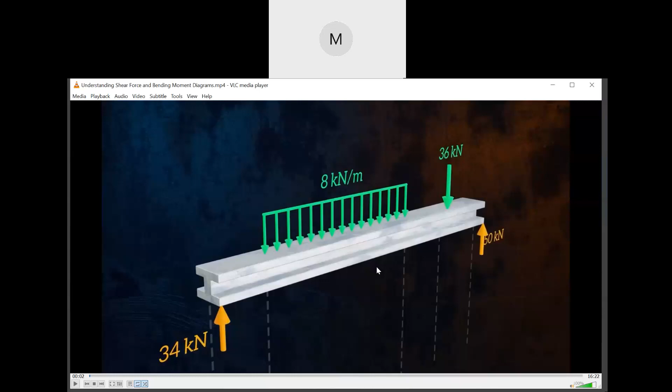Can you see my screen? Can you all see my screen? Can you all see my screen? Sir, okay.

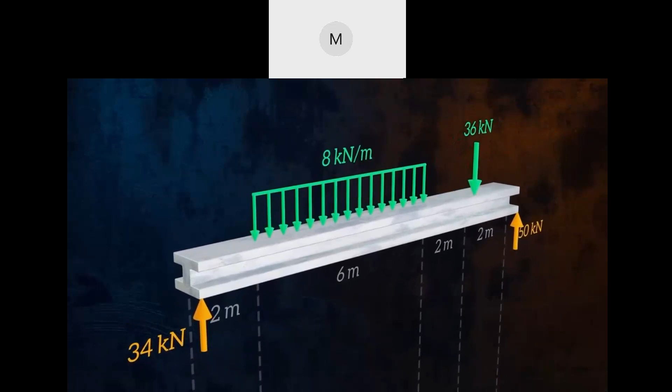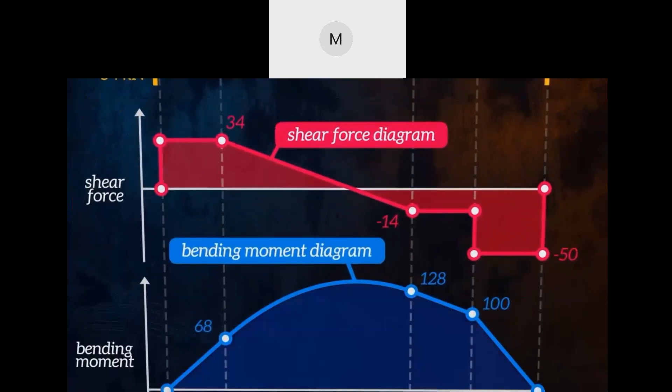Shear force and bending moment diagrams are powerful graphical methods that every mechanical and civil engineer should know how to use to analyze a beam under loading. In this video, I'll explain exactly how to master these diagrams, and we will see how they can be used to understand how a beam is loaded. I want to start by explaining what shear forces and bending moments actually are.

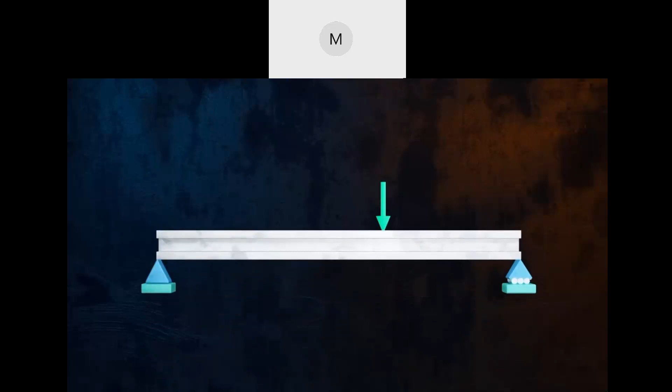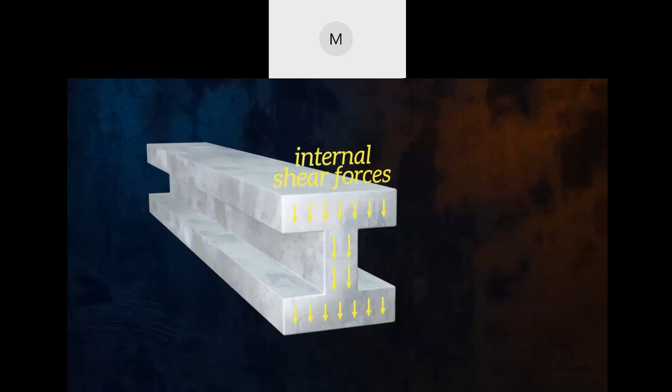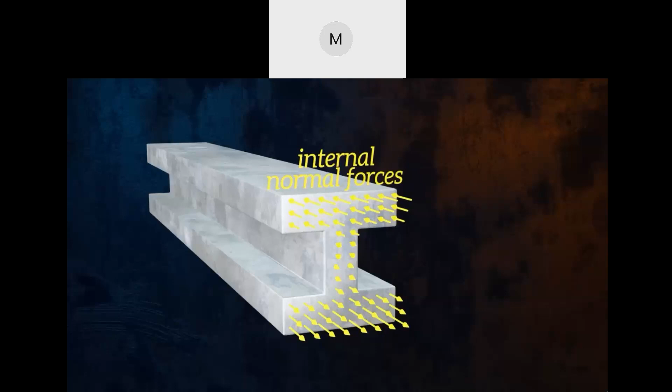When a beam is loaded, internal forces develop within it to maintain equilibrium. These internal forces have two components. We have shear forces, oriented in the vertical direction, and we also have normal forces, which are oriented along the axis of the beam. If the beam is sagging, the top of the beam will get shorter, and so the normal forces in the top of the beam will be compressive.

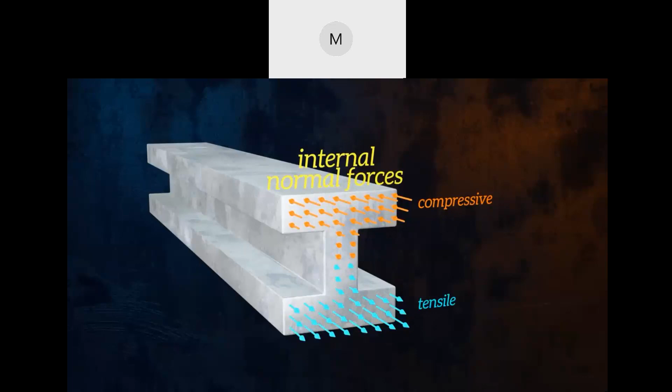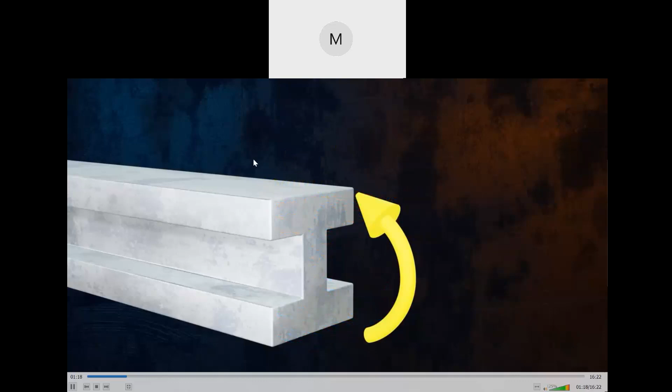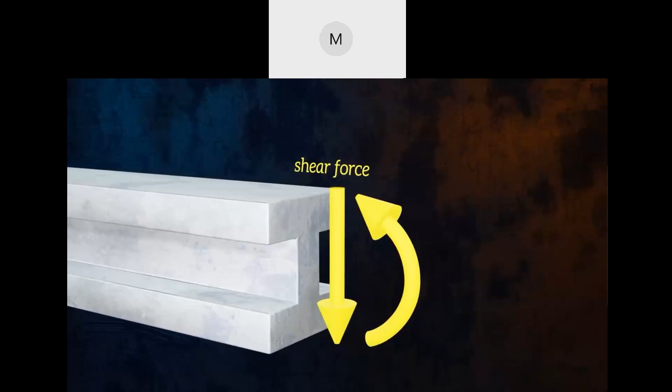The bottom of the beam will get longer, and so the normal forces in the bottom of the beam will be tensile. Each of the tensile normal forces has a corresponding compressive force, which is equal in magnitude but opposite in direction. As such, these forces don't produce a net normal force, but they do produce a moment. This means we can conveniently represent the internal forces acting on the beam cross-section using just two resultants. One, shear force, which is a resultant of the vertical internal forces, and one bending moment, which is a resultant of the normal internal forces.

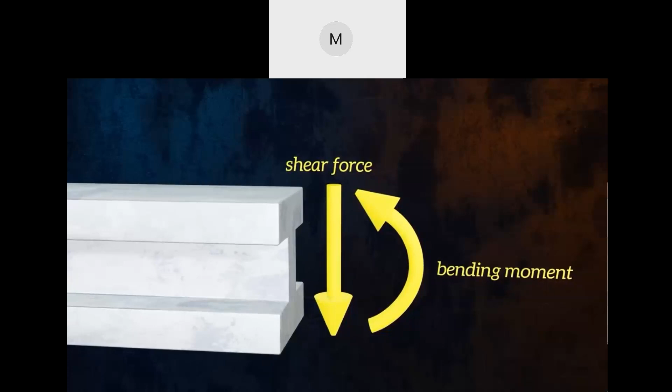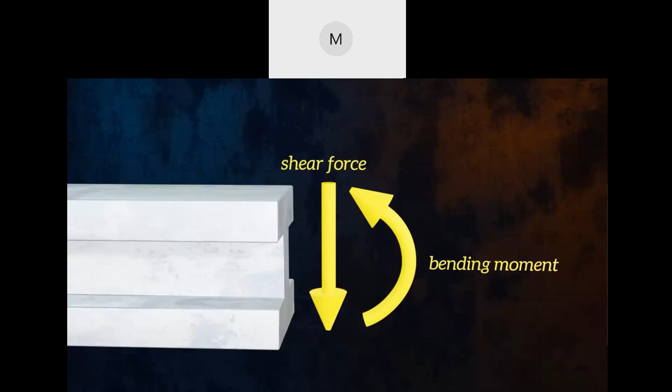This is a very common way of representing the internal forces within a beam. Drawing the shear force and bending moment diagrams is just figuring out what these internal forces are at each location along the beam. These resultant shear forces and bending moments will depend on the loads acting on the beam and the way in which the beam is supported. Beams can be loaded in a number of ways, the most common being concentrated forces, distributed forces, and concentrated moments.

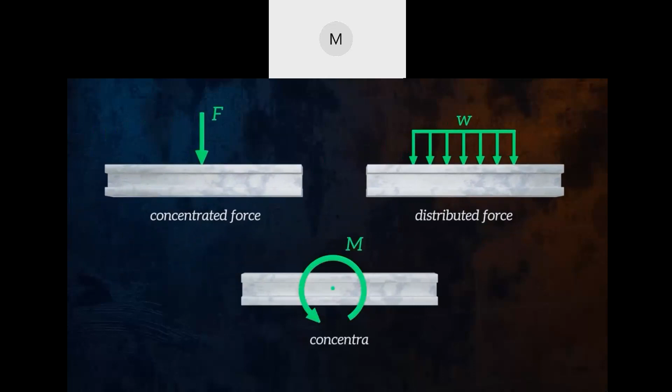Beams can also be supported in a number of different ways. They can have pin supports, roller supports, or be fully fixed, which each restrain the beam in different ways. Pin supports prevent vertical and horizontal displacements, but allow rotation. Roller supports prevent vertical displacements, but allow horizontal displacement and rotation. Fixed supports prevent all displacements and rotation.

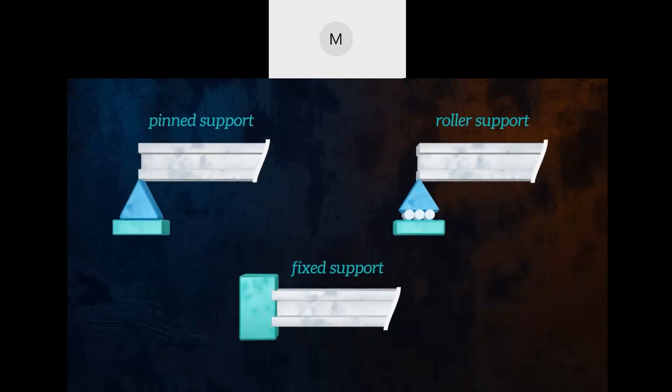If a certain degree of freedom is restrained at a support, we will have a corresponding reaction force or reaction moment at that location. For example, rotations are permitted for a pin support, so there is no reaction moment, but displacements in the vertical and horizontal directions are prevented, so we will have horizontal and vertical reaction forces. So how do you determine the shear forces and bending moments within a beam? There are three main steps we need to follow.

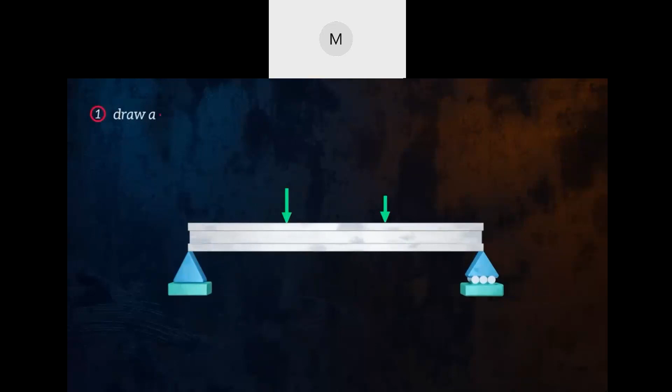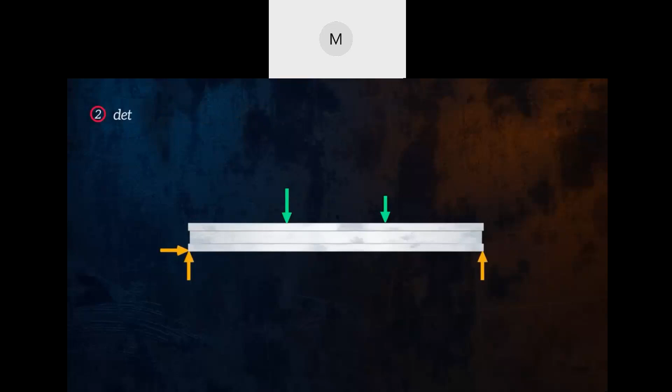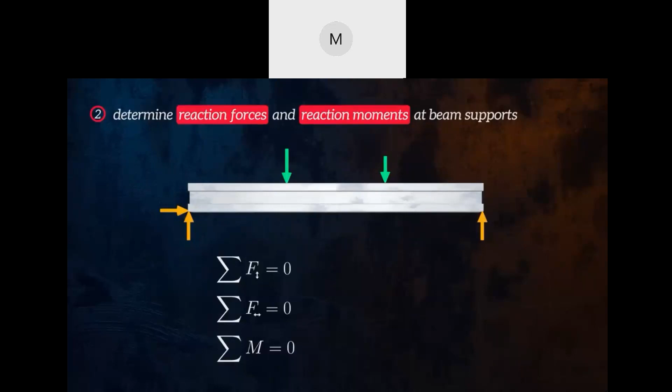First, we draw a free body diagram of the beam. This shows all of the applied and reaction loads acting on the beam. The next step is to calculate the magnitude of the reaction forces and reaction moments at all of the beam supports. We do this using the concept of equilibrium. To maintain equilibrium, all of the forces in the vertical and horizontal directions should cancel each other out. Similarly, all of the moments acting at every point along the beam should cancel each other out. This gives us a set of simple equations we can solve to calculate the reaction forces and moments.

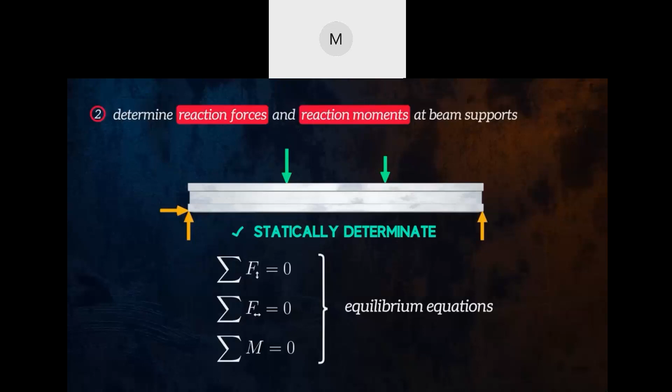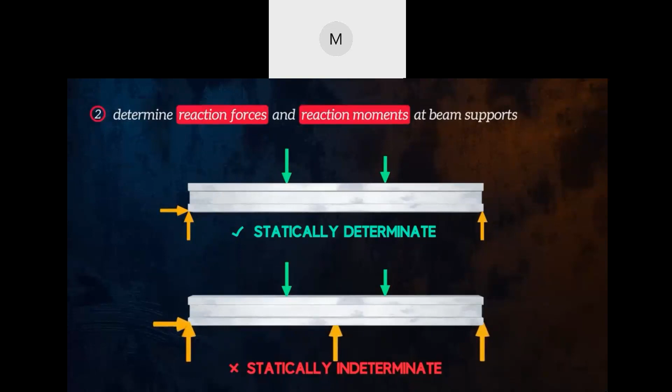If we can calculate all of the reaction loads using the three equilibrium equations, the beam is said to be statically determinate. For some beam configurations, like this one shown here, we won't be able to calculate all of the reaction loads because we have too many unknowns and not enough equilibrium equations. In this case, the beam is said to be statically indeterminate. This beam has 4 reaction forces, but we only have 3 equilibrium equations. To solve this beam, we would need to use slightly more complicated methods and consider boundary conditions. In this video, I will only cover statically determinate cases, where we can use the equilibrium equations to calculate all

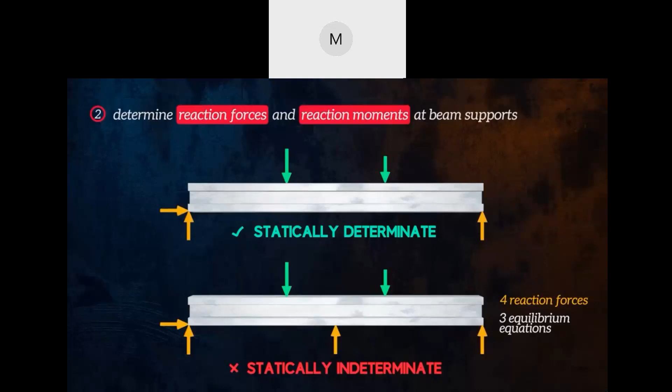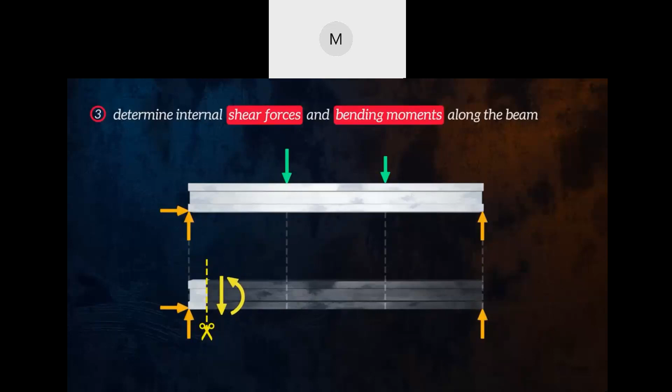Of the reaction loads. Once we have calculated all of the reaction loads, the third and final step is to figure out the internal shear forces and bending moments at every location along the beam. To do this, we will use the concept of equilibrium again. If we cut our beam at any location, the internal forces and moments need to cancel out the external forces and moments so that equilibrium is maintained. This allows us to easily calculate the shear force and bending moment at each location along the beam. All we need to do is start from one side of the beam and move the location of the cut along the beam, calculating the shear forces and bending moments as we go.

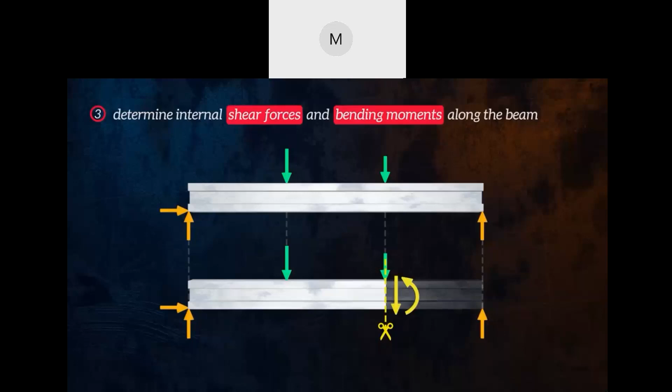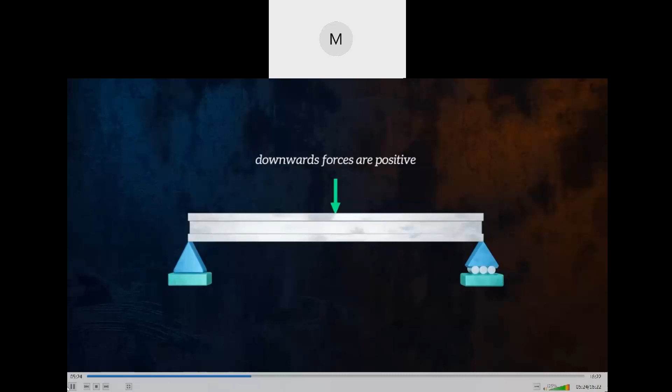Now is a good time to define the sign convention we will be using. Applied forces will be positive if they are acting in the downwards direction. For shear forces and bending moments, the positive sign convention will be as shown here.

If the beam is on the left side of our cut, shear forces pointing downwards will be positive. If the beam is on the right side of our cut, shear forces pointing upwards will be positive.

Positive bending moments will be those that put the lower section of the beam into tension. Another way to think about it is that bending moments which cause sagging of the beam are positive, and those that cause hogging of the beam are negative.

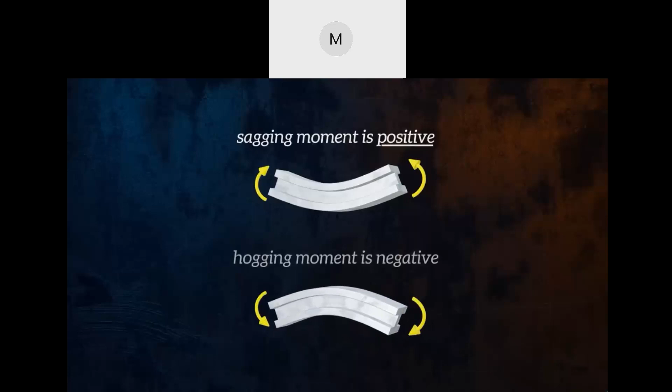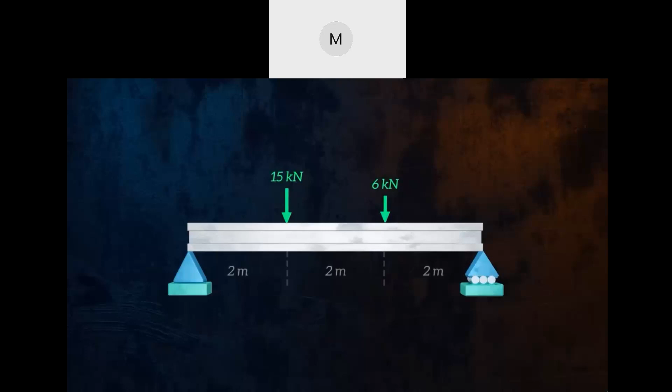Let's take a look at an example of a beam with pinned and roller supports, loaded by 2 concentrated forces. First, we draw the free body diagram. We can then use the equilibrium equations to determine the unknown reaction forces at point A and point B.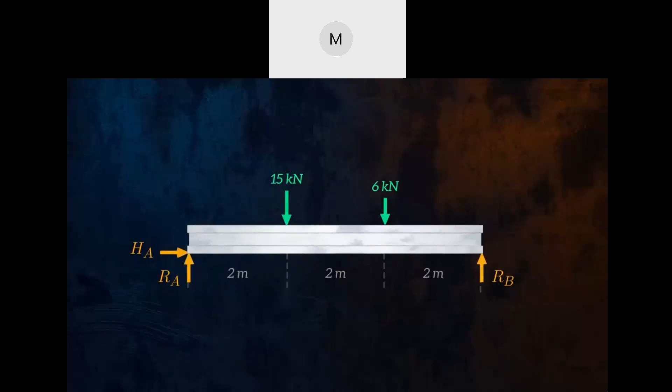The sum of the forces in the vertical direction is equal to 0, so RA plus RB is equal to 15 plus 6. Because HA is the only horizontal force, it must be equal to 0.

We also know that the sum of the moments about any point along our beam must be 0. Let's consider the moments about point B. That gives us this equation, which we can solve to determine that RA is equal to 12. By substituting RA into the previous equation, we can deduce that RB is equal to 9.

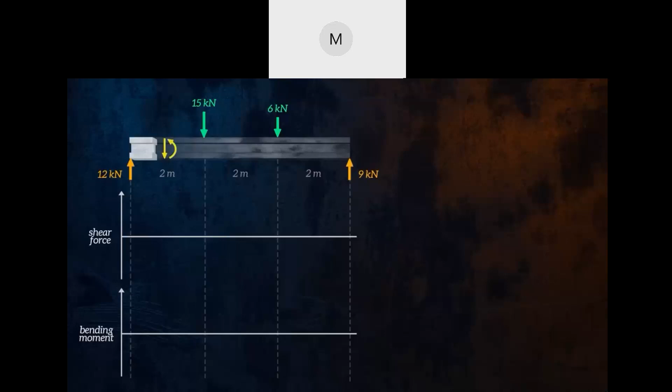Now that all of the external loads acting on the beam are defined, we can draw the shear force and bending moment diagrams. We will start from the left-hand side of the beam. Let's draw the free body diagram for a location immediately to the right of the 12 kilonewton reaction force.

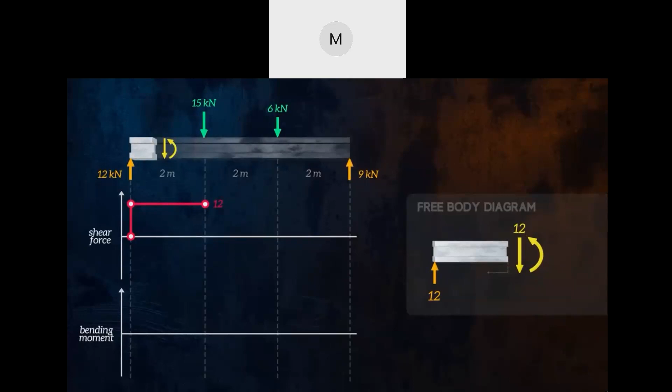To maintain equilibrium, the shear force must be equal to the reaction force. We can draw this on our shear force diagram. The shear force will be constant until we reach the next applied force. The bending moment must be equal to the 12 kilonewton reaction force multiplied by the distance x to the reaction force. This gives us the equation for a straight line, which we can draw on our bending moment diagram.

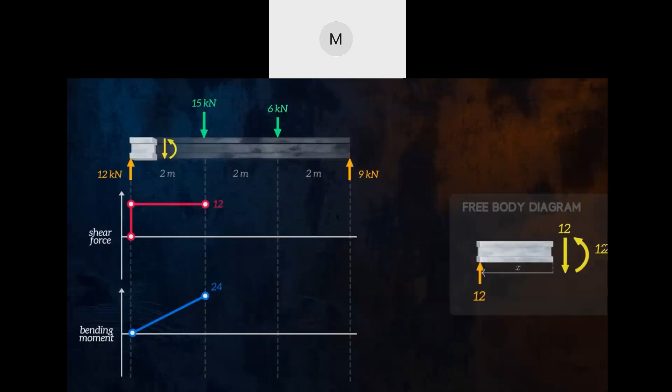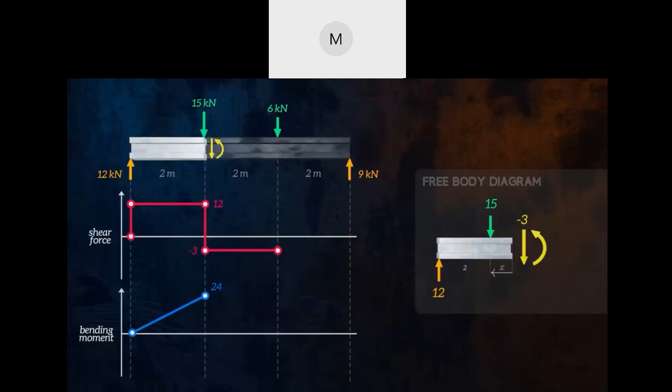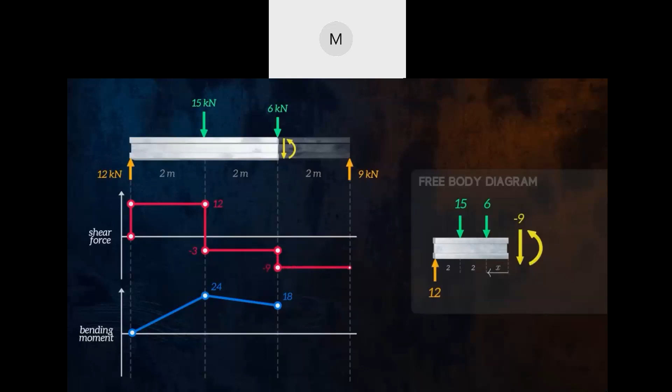We then repeat the process by moving the location of our cut further to the right. This time we place the cut immediately after the 15 kilonewton force, and we draw the free body diagram again to determine the shear force and the bending moment. We repeat this process until we have covered the full length of the beam. We end up with the complete shear force and bending moment diagrams for the beam.

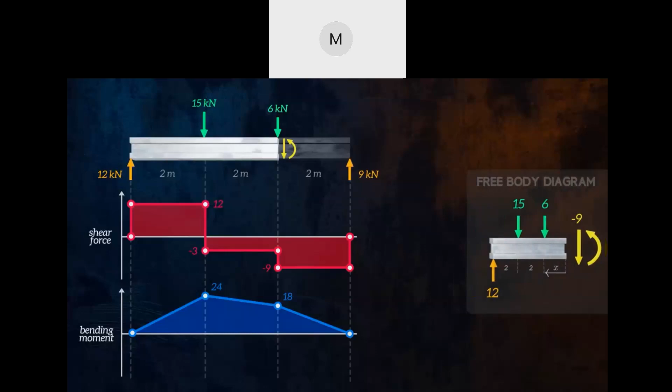That example was a fairly simple one. For cases with more complex loading, drawing the shear force and bending moment diagrams can be more difficult. There are relationships between the applied loads, shear forces, and bending moments, which will help us better understand what our diagram should look like. Let's consider a beam loaded by an arbitrary distributed force.

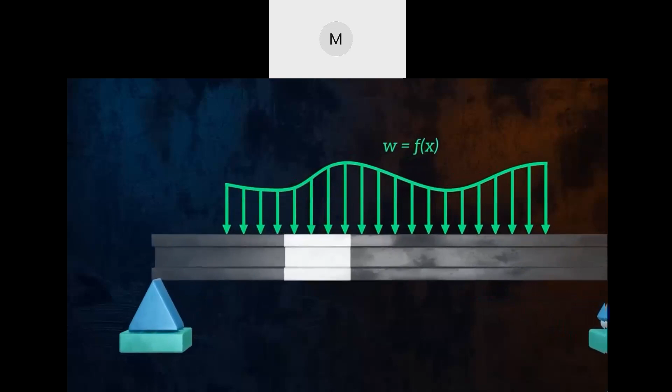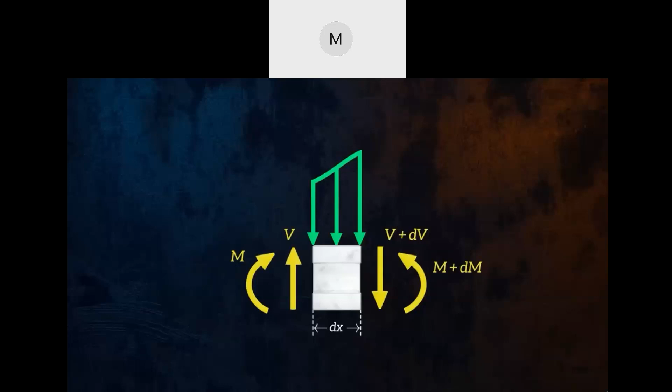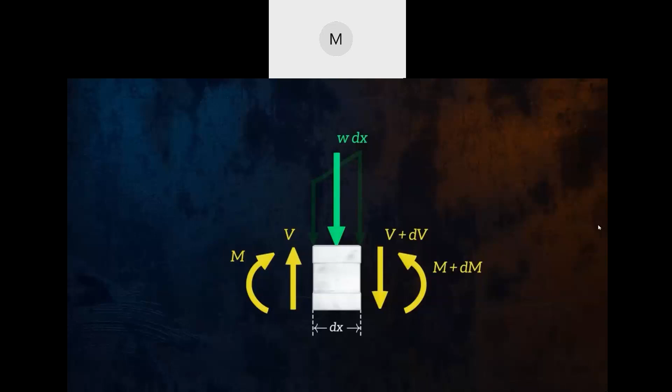We can zoom in to look at an infinitesimally small segment of the beam with a width equal to dx and draw the free body diagram. Over such a short section of the beam, the distributed force can be assumed to be uniform, and we can replace it with an equivalent concentrated force. By applying the equilibrium equations to this free body diagram, it is possible to demonstrate that the following relationships exist between the applied distributed force, the shear force graph, and the bending moment graph.

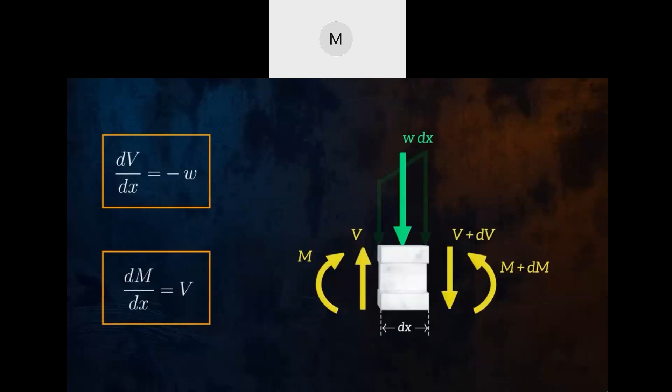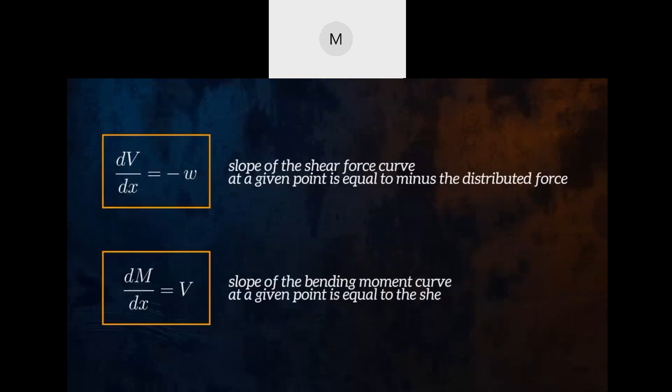The quantity dV over dx is the slope of the shear force curve, and at a given point along the beam, it is equal to minus the distributed force. Similarly, dM over dx is the slope of the bending moment curve, and at a given point, it is equal to the shear force. If we integrate the first equation, we can show that the change in shear force between 2 points is equal to the area under the loading diagram between those 2 points.

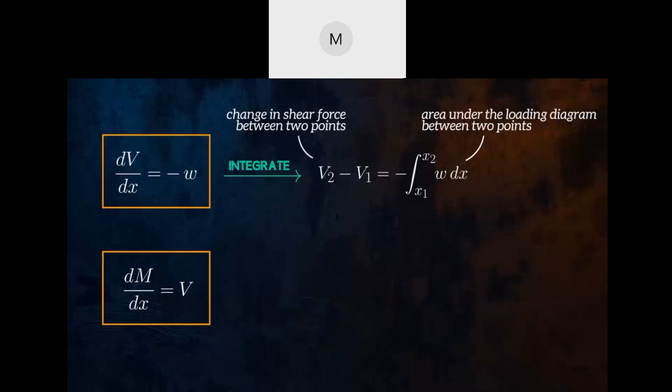And if we integrate the second equation, we can show that the change in bending moment between 2 points is equal to the area under the shear force curve. This is really useful information we can use to help construct or sense check our shear force and bending moment diagrams. Let's take a look at an example. This beam has an applied distributed force and a concentrated force. Let's quickly draw the shear force and bending moment diagrams.

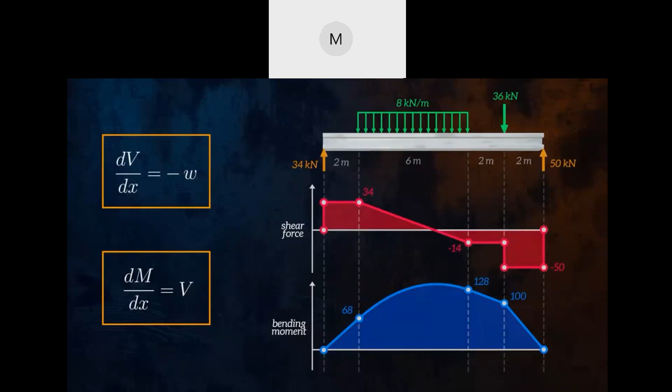By using the free body diagram method, we can show that the bending moment curve for the section of the beam under the distributed force is defined by the quadratic equation negative 4x squared plus 34x plus 68. If we differentiate this equation, we get negative 8x plus 34, which based on the dM/dx equation above, we now know is the equation for the shear force curve in this section of the beam. If we differentiate again, we get negative 8, which is the equation for the distributed force.

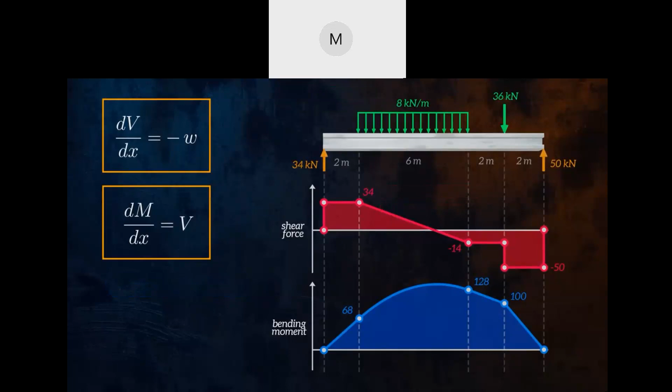This is a great way to sense check your shear force and bending moment diagrams. Another way of checking your diagrams is using the area equations I mentioned earlier. The area under the shear force curve, highlighted here, is equal to 34 times 2, which is 68. This is equal to the change in bending moment over this section of the beam.

We can also calculate the area under the shear force diagram for the beam section under the distributed force. The total area of this section is equal to 72.3 minus 12.3, which is 60. This is equal to the change in bending moment of 60 kilonewton meters over this section of the beam.

Where concentrated forces are applied, there is a sudden jump in the shear force diagram, and where concentrated moments are applied, there is a sudden jump in the bending moment diagram. These equations will not be applicable across discontinuities in the diagrams. One final observation we can make based on these equations is that when the shear force is equal to 0, the bending moment curve will be at a local minimum or maximum.

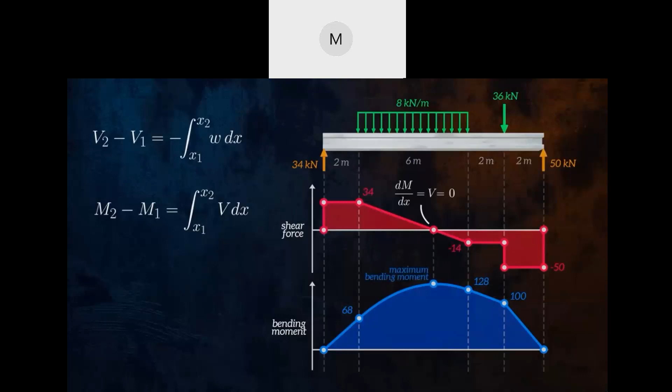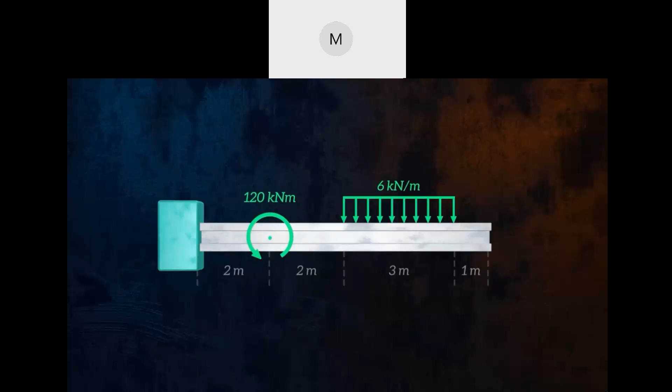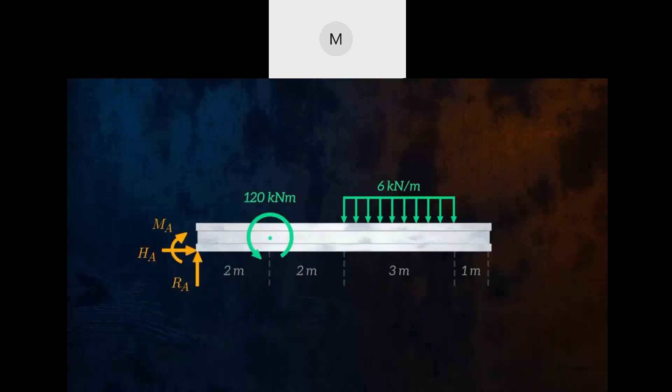Let's look at one last example. Here we have a cantilever with an applied concentrated moment of 120 kilonewton meters and a distributed force of 6 kilonewtons per meter. Again, we start by drawing the free body diagram. Because the support is fully fixed, we have vertical and horizontal reaction forces, Ra and Ha, and a reaction moment, Ma.

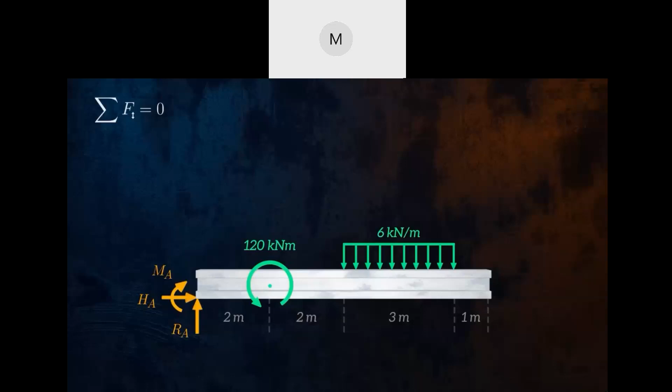Let's look at our first equilibrium equation. The sum of forces in the vertical direction is equal to 0. In this case, the only forces acting in the vertical direction are the reaction force Ra and the distributed force. So Ra is equal to 6 times 3, which is 18. Ha is the only force in the horizontal direction, so it must be equal to 0.

Next, we can take the sum of the moments acting at point A. In calculating the moment caused by a uniformly distributed force, you can remember that it is equal to a concentrated force located in the middle point of the load. This gives us Ma equals 21.

To calculate our shear forces and bending moments, we will start on the left side of the beam and move towards the right. This is our first free body diagram. The shear force calculation is easy, as we only need to consider the reaction force of 18 kilonewtons. The bending moment needs to take into account the reaction moment and the reaction force. At x equals 0, the bending moment is equal to the reaction moment of 21 kilonewton meters. As we move to the right, we also need to consider the moment caused by the 18 kilonewton reaction force. This gives us the equation for a straight line.

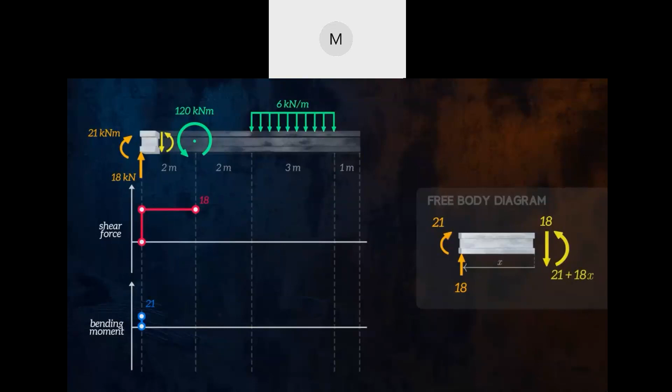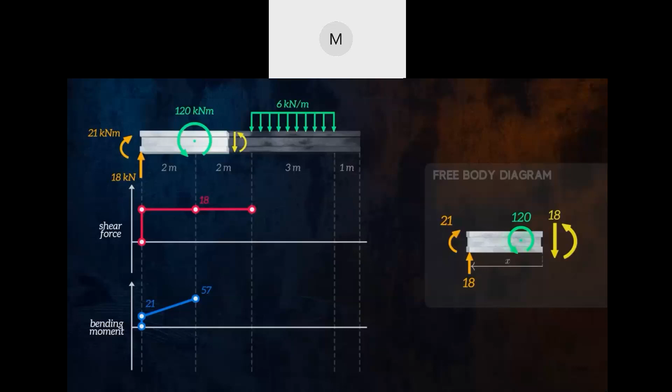We can then move our cut to the right of the concentrated moment. The moment won't affect the shear force, which will remain constant at 18 kilonewton until we reach the distributed force. But it does cause the bending moment to suddenly drop by 120 kilonewton meters. After the drop, the bending moment is again defined by a straight line. Things get a little more tricky when we reach the distributed force.

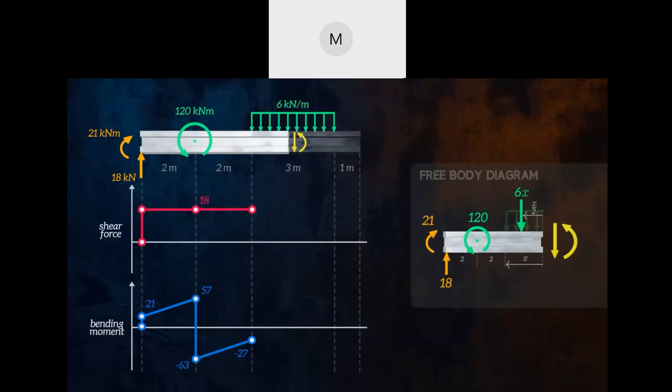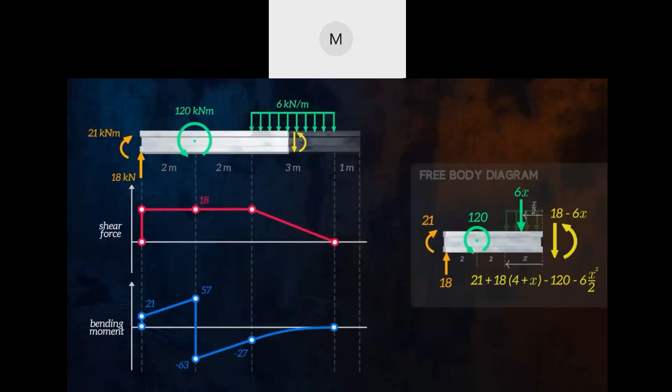We can replace the uniformly distributed force by an equivalent concentrated force with a magnitude of 6 multiplied by the length x over which the force is applied. This force is located at a distance of x over 2 from our cut. We can then calculate the shear force and bending moment equations using the normal approach. The bending moment in this section of the beam is defined by a quadratic equation. No loads are acting on the small 1 meter section to the right of the distributed force, so shear forces and bending moments in that section will be equal to 0.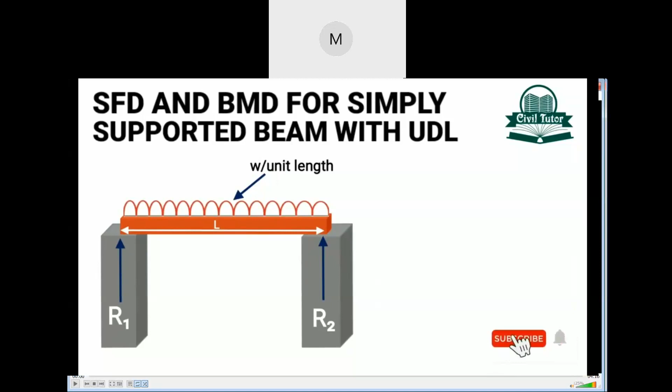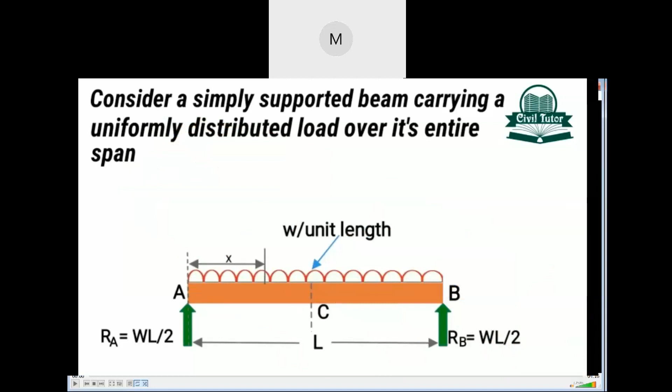Consider a simply supported beam carrying a uniformly distributed load W per unit length over its entire span. The support reactions will be equal and their magnitude will be equal to half the total load acting on the entire span. So due to the UDL, the support reaction at A will be equal to the support reaction at B, equal to the total load divided by 2, while the total load is the load intensity W times the span L, which will be equal to WL divided by 2.

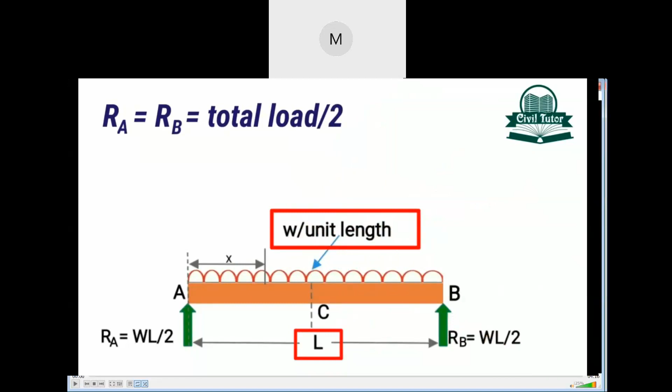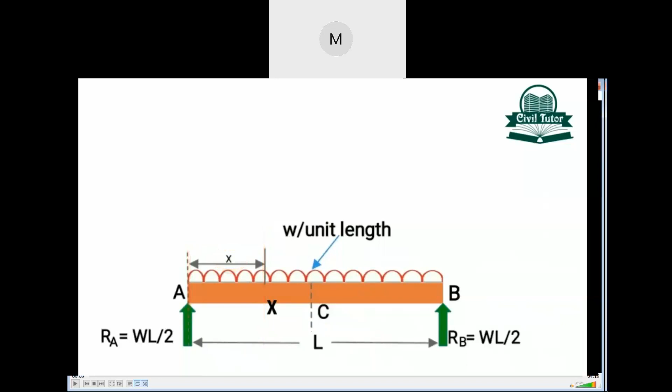Now consider a section XX at a distance of x from left end A. The shear force at this section will be equal to the summation of all the forces acting on the left portion of this section XX. So shear force at this section will be given by Fx equal to plus Ra minus W into this distance x, equal to plus WL divided by 2 minus Wx, which clearly varies by a straight line law.

At point A, the value of x will be equal to 0. So on substituting this value in the shear force equation, we will get the value of shear force at point A equal to plus WL divided by 2. At point C, x will be equal to L divided by 2. On substituting this value in the shear force equation, we will get the value of shear force at point C equal to 0.

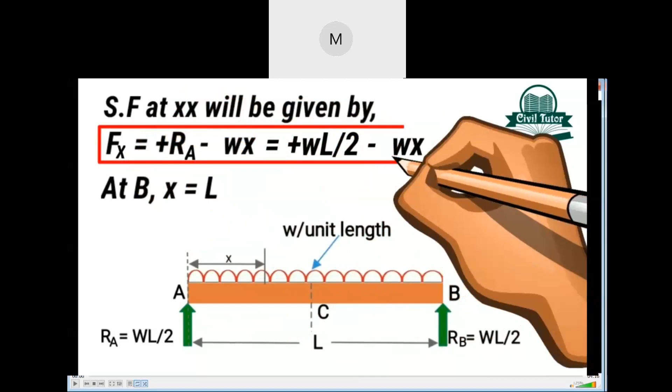And at point B, x is equal to L. On substituting this value in the equation of shear force, we will get the value of shear force at point B equal to minus WL divided by 2.

In order to draw the shear force diagram, we will start from the baseline AB. At point A, the value of shear force is plus WL divided by 2, so we will draw this plus WL divided by 2 to some scale above the baseline. And at point B, the shear force is minus WL divided by 2, so we will draw minus WL divided by 2 below the baseline at point B. By joining these 2 points, we will get the resulting shear force diagram.

The bending moment at the section XX will be given by Mx equal to plus Ra into x minus W into this distance x into x divided by 2, where this x divided by 2 is the centroid of this portion x, which will be equal to WL divided by 2 into x minus Wx square divided by 2.

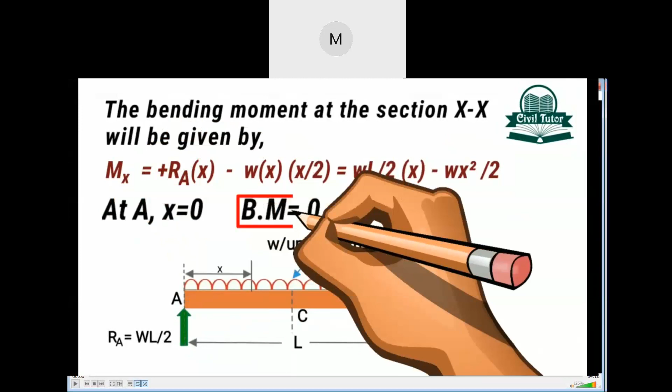At point A, the value of x will be equal to 0. On substituting this value in the bending moment equation, we will get the value of bending moment at point A equal to 0. At point C, x is equal to L divided by 2, and on substituting this value in the bending moment equation, we will get the value of bending moment at point C equal to plus WL square divided by 8. And at point B, x is equal to L, and by substituting this value in the bending moment equation, we will get the value of bending moment at point B equal to 0.

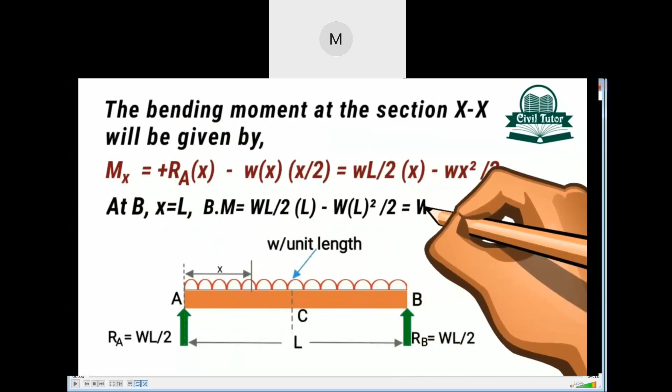In order to draw the bending moment diagram, we will start from the baseline AB. Since the maximum bending moment is at point C and equal to plus WL square divided by 8, we will draw plus WL square divided by 8 to some scale at point C, and at points A and B the value of bending moment is equal to 0. Since the bending moment equation for span AB clearly indicates that the bending moment from A to B varies by a parabolic curve, we will join points A and B by a parabolic curve. This will be our resulting bending moment diagram.

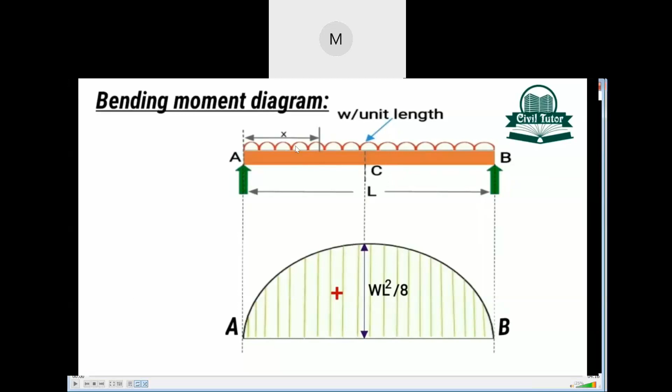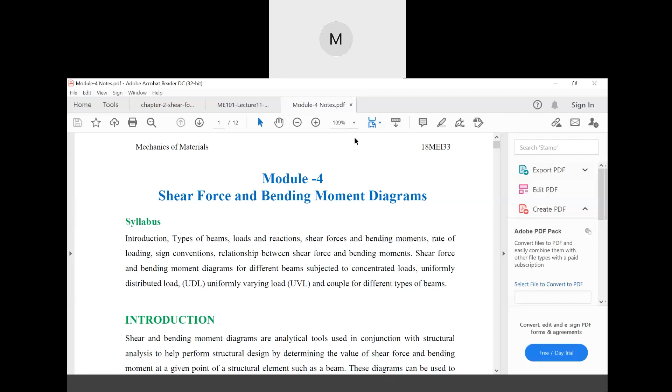So for the materials, I hope this is clear for everyone of you. Why are everyone of you giving attendances now? I don't understand. It started at around just when I started the class. Amarjit Sonwar started giving the attendance, and now everyone is giving the attendance. I don't know why. Can anyone please tell me, those who have given the attendances, the reason? Or should I mark all of them absent?

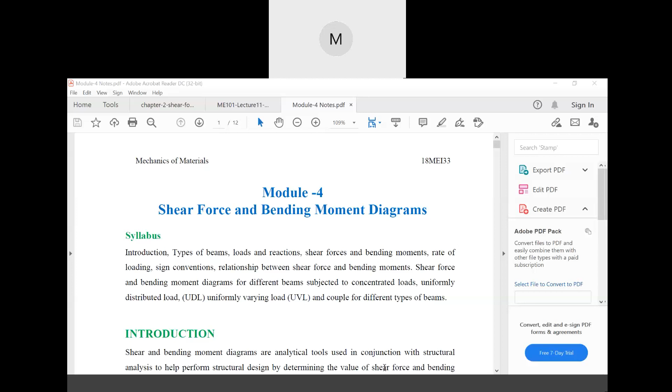Everyone is giving attendances. I am not asking any one of you to give attendances, right? So I'll mark all these people absent, if no one gives me any justification. Can anyone give me any justification? Why are you giving attendances? Please, can anyone give me justification why you are giving attendances? All of you are giving attendances in the chat box when I have not asked for it.

Sir, can you share the link of that video, the two videos? I'll send you. But why are your friends giving attendances? I want that only. Oh no, sir, I didn't give. I know you have not given it, but this does not look good, right? This does not look good. Why are your friends giving? Can anyone please give me a justification? I'll mark all of them absent today.

Network problem. It may disconnect. Okay, one person gives network problem. Well, every one of you is having network problem today? So many people are having network problem. I don't believe that. So many people are having network problem or what today? What about others? This is not good, right? This is not good. This should not happen actually.